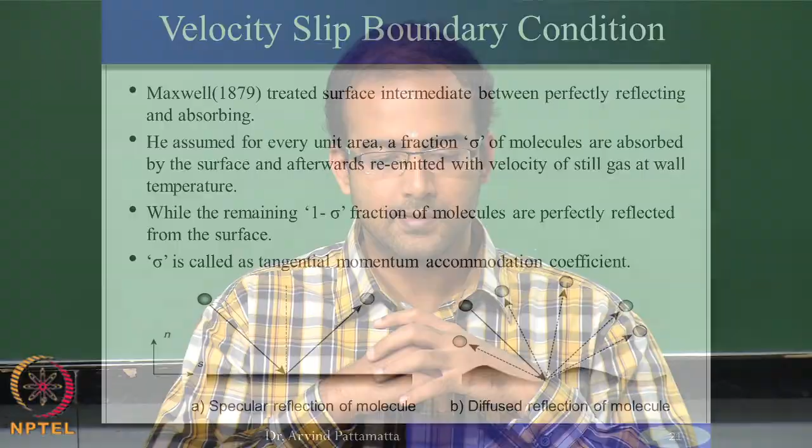Therefore, Maxwell proposed that of the total number of molecules, a fraction sigma will be emitted the way diffuse scattering takes place, and the rest, 1 minus sigma, will be emitted the way specular scattering takes place. Okay. So, this sigma he called the momentum accommodation coefficient. Okay. That means it tells you whether you conserve momentum or not. The expression for this you can say

you can either write components in the tangential or in the normal direction, but the general philosophy is you define the momentum accommodation coefficient as the ratio of the difference between the incoming momentum and the momentum of the reflected energy carrier or gas molecule which is leaving the boundary, divided by the difference between the incoming momentum and the momentum according to the Maxwell-Boltzmann distribution function. Okay. So, that is your Pw, that is your thermalized value based on the Maxwell-Boltzmann distribution. So, what does it mean in the case of diffuse scattering? What should be the value of the momentum accommodation coefficient?

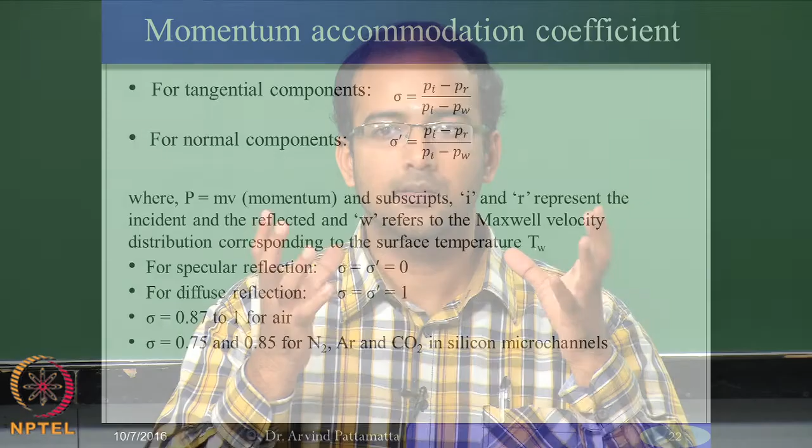What do you think will be the value of PR? PR will be equal to Pw in the case of diffuse scattering, because everything is absorbed, thermalized and emitted based on the conditions on the boundary. Okay. So, it is emitted like your condition, we put F plus is equal to F equilibrium, that is your diffuse boundary condition. So, therefore, in the case of diffuse scattering, your sigma will be equal to what?

1. Okay. So, whereas if you talk about specular scattering, what happens to sigma? 0, because PR will be equal to Pi. Okay. The momentum is perfectly conserved and it does not have any idea about what is the momentum depending on the Maxwell-Boltzmann statistics. Okay. So, in that case your sigma will be equal to 0, it is a perfectly reflecting surface, and the other diffuse scattering will be sigma equal to 1, right.

So, therefore, depending on the kind of scattering, either diffuse or specular, and this already you know from the knowledge of nanoscale transport. You know that these two are the possible kinds of boundary conditions you apply and solve from the Boltzmann transport equation. However, what happens, how do you incorporate this information into the continuum equation? Now, this is where it is becoming very tricky.

If you solve the equation, it is through the approximation made by Kundt and Warburg. So, they have said that this is equivalent to giving a slip boundary condition at the wall, provided you know your slip boundary condition is related to the slip length. Okay. The slip length value is xi times the velocity gradient at the wall. So, therefore, somehow the slip length should be related to this accommodation coefficient.

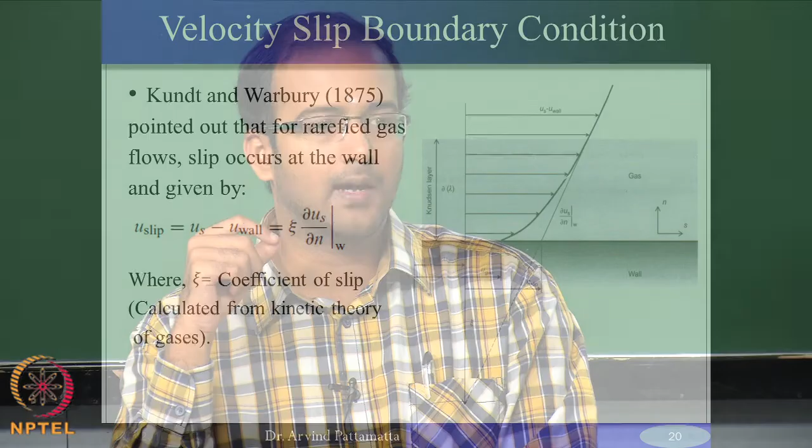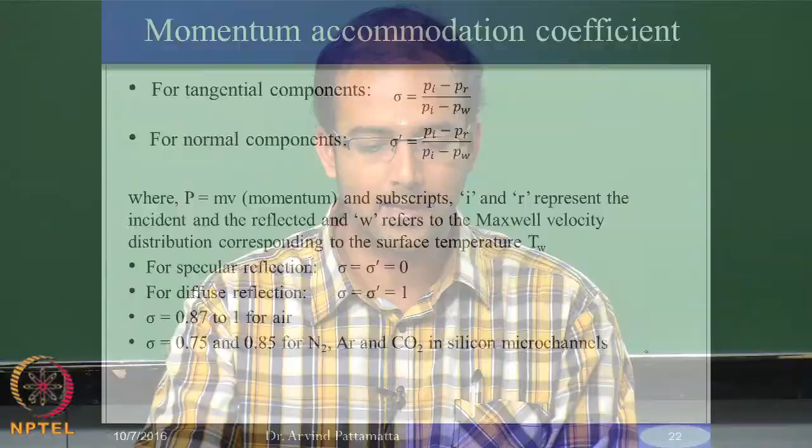So, the accommodation coefficient has the knowledge of the microscale scattering at the boundaries, and somehow in an ad hoc empirical manner that has to be accounted for through the formulation of slip length, and therefore, you assume that the slip length can be related to the accommodation coefficient through an expression like this. That means, for example, in this case you can write this as (2 minus sigma) by sigma times the mean free path of the gas molecules. So, this is one ad hoc way of expressing the relation between slip length and the accommodation coefficient.

So, in the case of diffuse scattering, your sigma equal to 1, and therefore, your slip length will be equal to what? Lambda, mean free path. Okay. So, in the case of specular scattering, what will be the value? If you are approaching value of sigma going to 0, this value will go to infinity, right. So, the slip length is approaching infinity. Okay. So, these are two extreme limits,

and between these two limits you can assume some values, something like sigma equal to 0.2 or 0.3 or 0.5, or if you know exactly the value for a particular fluid. For example, if you take the case of air, generally values of sigma are quite high, it is towards the diffuse side. So, it is between 0.87 and 1. Okay. So, if you take some other inert gases like argon, nitrogen, and also depends on the surface material. If you look at silicon material as a microchannel, and if you use nitrogen or argon or carbon dioxide, so the values of this sigma can vary between 0.75 and 0.85. Okay. So, they are always closer to the diffuse scattering.

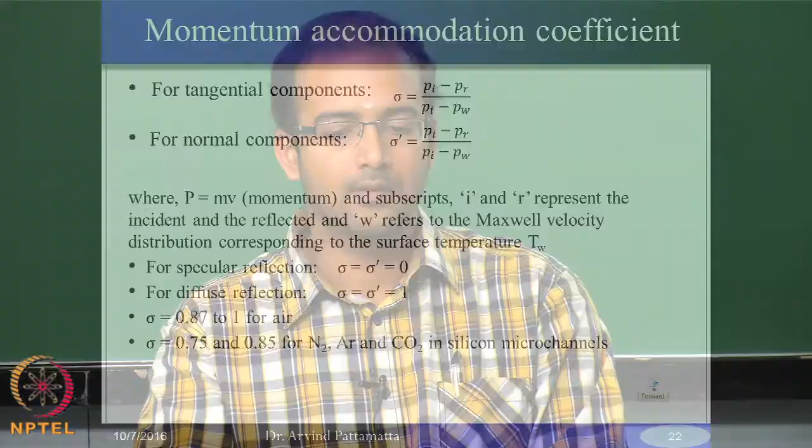Okay. Maxwell velocity distribution is some function of some exponential type, or is there any distribution is available? No, but that is correct, but the value of sigma theoretically cannot be calculated. Although we define sigma in this way, you cannot use theory to calculate sigma. It is only coming from experimental conditions, where, as I said yesterday, how do you determine experimentally? You just extrapolate it, make a virtual origin and determine what is your slip length, and then now you have related your slip length with sigma, and therefore, you can back calculate from experiment what will be the value of sigma. Okay. So, that is the standard procedure.

So, therefore, this is one component of the velocity slip, and in many experiments they have observed that, theoretically, if you add this, the theoretical value of the velocity slip is not matching the experimental value. So, there is also some extra component which is causing an additional slip at the wall, which could not be explained by this particular term alone. So, later on they understood that this was due to a phenomenon called thermal creep.

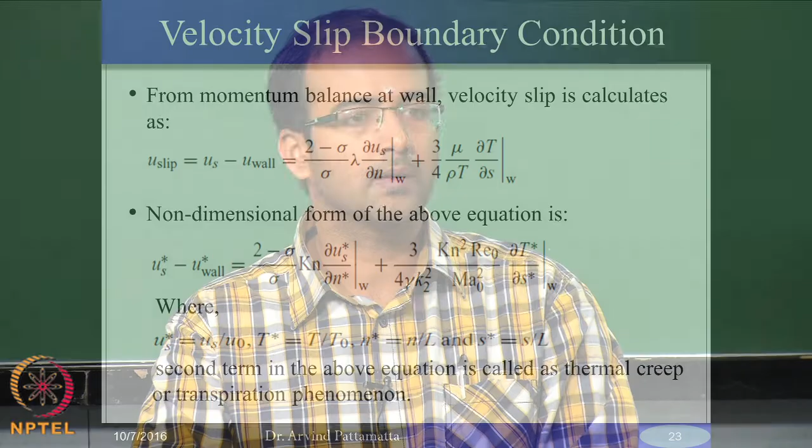Okay. So, in which you also produce additional slip due to a temperature gradient. So, in addition to having a uniform temperature, in a case where you have a temperature gradient, the gas molecules tend to move from the lower temperature side to a higher temperature side, that is in the direction of the applied temperature gradient. So, in addition to the normal Maxwell slip, you also have an additional slip due to the thermal creep. So, the second term here represents the thermal creep slip.

So, that is related to your temperature gradient, which is tangential, which is along the wall, applied in the tangential direction, whereas the velocity gradient is in the normal direction to the wall. So, therefore, these two components put together would adequately explain the slip velocities that are measured experimentally. Okay. So, in general, this kind of slip boundary condition has become popularly referred to as the Maxwell slip boundary.

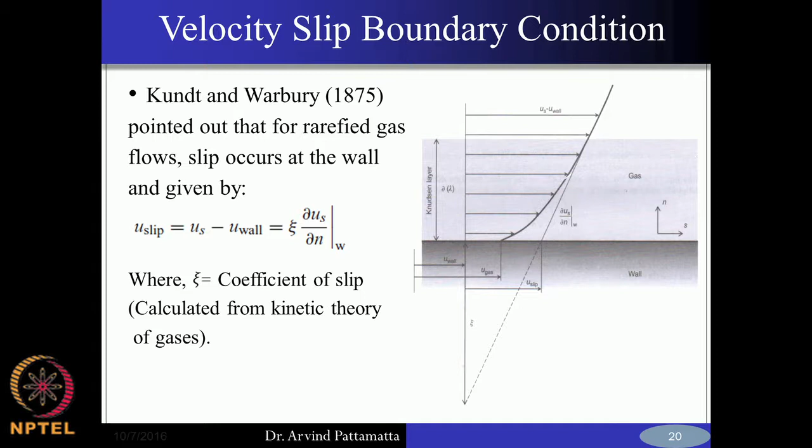Some people also refer to this formulation that we are referring to here as the Navier slip boundary. Okay. So, in the Navier slip boundary, you just give some value of slip length arbitrarily, it could be 0.5 or 0.7 or 0.2, whatever it is, but if you want to relate it in terms of accommodation coefficients, then it becomes the Maxwell slip boundary condition. Okay. And apart from that, you can also write boundary conditions for temperature, right.

We have seen that you can have slip of both momentum as well as energy or temperature. So, this we have already seen in nanoscale transport. There is a temperature discontinuity at the boundary, and at high Knudsen numbers, you will find this discontinuity will increase. Therefore, to account for this, a similar analogy has been drawn, only that in place of the momentum accommodation coefficient sigma, we replace this with what we call the thermal accommodation coefficient sigma subscript T.

Okay. So, same analogy, except that we assume that these gas molecules with some energy are approaching the boundary, and a fraction of that is absorbed and re-emitted based on the Maxwell-Boltzmann statistics, the other is reflected perfectly. But in this case, to distinguish this fraction from the momentum accommodation coefficient, we use the notation sigma subscript T. Okay. And we once again rewrite it the same way as the velocity slip, we introduce a parameter called the temperature slip, which is the temperature of the fluid at the boundary minus the wall temperature. Okay. So, that is equal to a different slip length now.

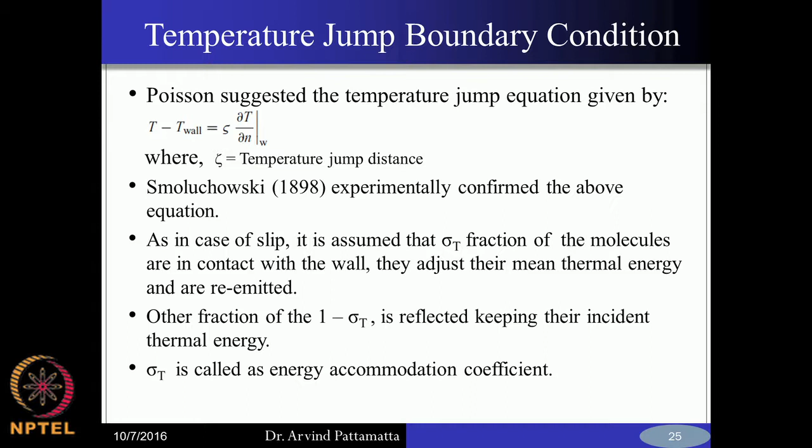So, this is actually popularly referred to as the Smoluchowski boundary condition, because Smoluchowski experimentally confirmed that this kind of equation can be used to match the theoretical value of temperature slip with the experiment very well, using this parameter and assuming values of sigma T. Okay. So, therefore, this boundary condition is referred to as the Smoluchowski slip boundary. So, the velocity one is referred to as Maxwell slip, and the temperature slip is referred to as Smoluchowski, right.

So, therefore, we can non-dimensionalize whether it is the velocity slip or temperature slip. As you can see, you have a mean free path here. So, if you non-dimensionalize your coordinate with respect to the characteristic dimension, the characteristic length scale L, for example, you introduce a new normal coordinate n star, which is equal to n by L, this is your normal coordinate, and similarly the tangential coordinate as S by L.

So, you can write this in terms of Knudsen number, and again the slip due to thermal creep also can be written in terms of Knudsen number squared, Reynolds number by Mach number squared. Therefore, sometimes these boundary conditions are also expressed in terms of purely non-dimensional numbers. So, these are non-dimensional values of slip. Similarly, you can do the same thing for the temperature slip. You can write this purely in non-dimensional fashion. You get a ratio of Knudsen number by Prandtl number.

Okay. So, once you now understand how this micro scale non-equilibrium at the wall can be incorporated into the continuum equation using these slip approximations for velocity and temperature, now it becomes quite easy to solve these governing equations for some standard cases like flow between two parallel plates, flow in a duct. So, these are some simple cases for which analytical solutions can be obtained. Only that now in the case of slip regime, you replace your no slip boundary condition with the appropriate Maxwell and Smoluchowski slip conditions.

Just to give some additional data, for sigma t, for combination of air, aluminum, air, steel, you have different values which are close to 1, whereas if you take clean surfaces without any deposition, which are quite smooth without much roughness, and use helium gas for example, this can be very small, close to 0. So, this 0.02 is the value of the thermal accommodation coefficient. Similar to how we define the momentum accommodation coefficient, we can define this based on the difference between the incoming energy of the gas molecules and what is coming out, divided by incoming minus what is emitted based on the Maxwell-Boltzmann distribution. So, I hope this is clear.

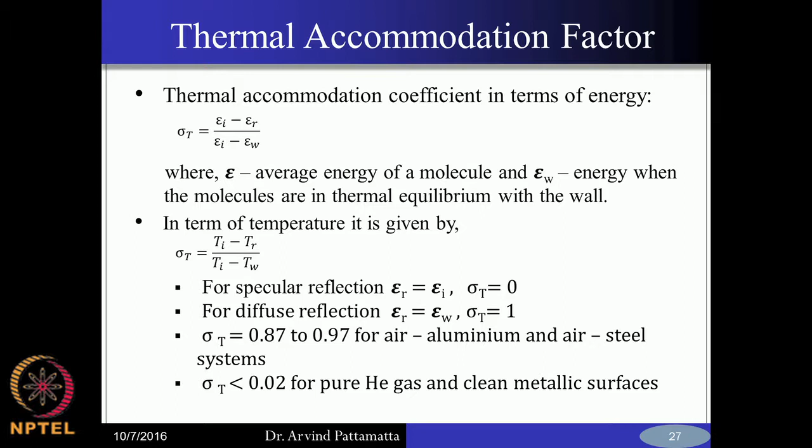So, this is the foundation of the slip flow regime. Now that we have defined the boundary conditions, we also know the conservation equations, which are for the compressible, Newtonian and isotropic case, and also the Knudsen number should be less than 0.1. This is where the continuum equations can be applied. So, this is called the slip flow regime. In this case, you solve the compressible form of the Navier-Stokes equation along with the appropriate slip boundary conditions, and this can quite accurately predict most of the experimental results in this particular slip flow regime.

And we will take the case where we can develop an analytical solution, that is, let us take a microchannel. Microchannel here means it is simply the 2-dimensional case of flow between two parallel plates. Just like you do your fluid mechanics of flow between two parallel plates, the same analysis is done here. So, we take the separation between the plates as distance 2h. Therefore, the origin starts from the center. It extends to plus h on to the top plate and minus h to the bottom plate, and you also assume the following things.

One, you are looking at only a steady state, steady flow system. Therefore, all the derivatives with respect to time can be assumed to be 0. So, all of the d rho by dt, du by dt, dT by dt, all of this are gone, and the other important condition to simplify this is fully developed. So, you assume the profiles to be fully developed, meaning you do not have any gradients of velocity in the x direction. In this case you have z coordinate. So, in the z direction, and also this is a 2D system, you do not have any gradient in the third direction.

Based on this you will be able to reduce the equations, and also you can assume that there are no volumetric forces, and to first start the hydrodynamic problem, there is no heat transfer. So, it is all isothermal. With this you can reduce the compressible Navier-Stokes equation to the following form. You only have the viscous forces, the shear stresses, and the other is your pressure gradient. So, the viscous force is balanced by the pressure gradient. The viscous force in this case will be the diffusion only in the y direction, that is your d square u by dy square.

And the pressure gradient will be in the z direction. So, your dp by dz, that means if you draw a control volume, you will have a viscous force on the top and the bottom plates, and this is to be balanced by the pressure gradient, and this viscous force is nothing but due to the diffusion of velocity in the vertical direction. Okay. So, therefore, the entire compressible equations reduce to a very simple form which is similar to your incompressible equation

for channel flow. Okay. So, therefore, there will not be any big difference between compressible and incompressible now that you have assumed a steady state and fully developed flows. And then we go on, we apply the boundary conditions to solve this. Now, the condition at y equal to 0 will be symmetry, right.

So, we have taken the origin to be at the center of the channel, and therefore, at y equal to 0 you can say that the velocity profiles will be symmetric between the top half and the bottom half, and you can simply apply the symmetry condition, which is du by dy equal to 0. Okay. And on the other side, so y equal to plus h, in the conventional channel case you will give the no slip condition, which is u equal to 0, but now you give the Maxwell slip boundary condition. Okay. So, therefore,

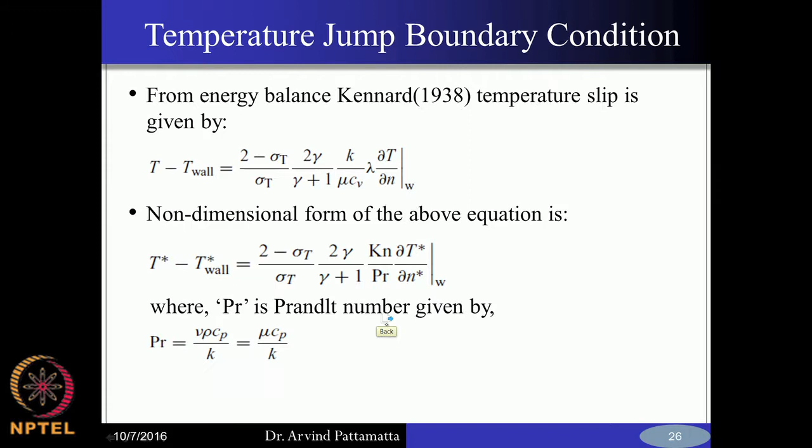So, in order to get the constants a1 and a2, you apply the two boundary conditions at y equal to 0 and y equal to h. So, can you try to do this now? So, you apply these two conditions, find out the constants and calculate how the velocity profile looks.

I think in this case the derivative is negative, no. So, your velocity profile is maximum at the center, and at y equal to h it will be negative. So, in order to get a positive value, you put, I think, a negative sign here. Your du by dy will be negative, right. So, in order to make sure your velocity is positive, therefore, you put a minus sign there, right. Otherwise, you get a negative value of velocity, which is not physical.

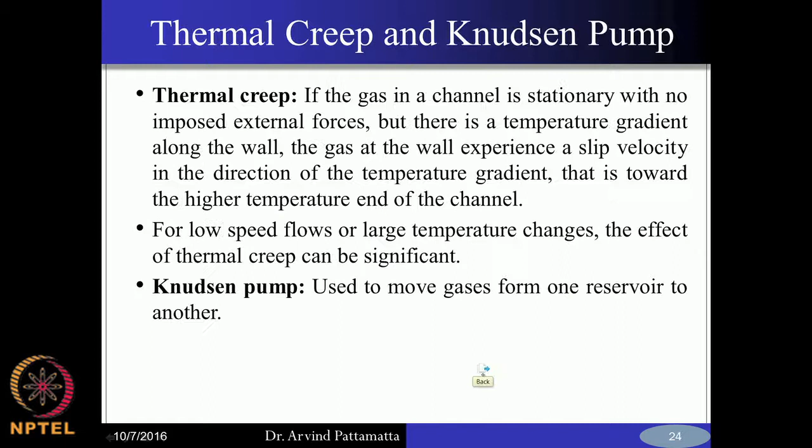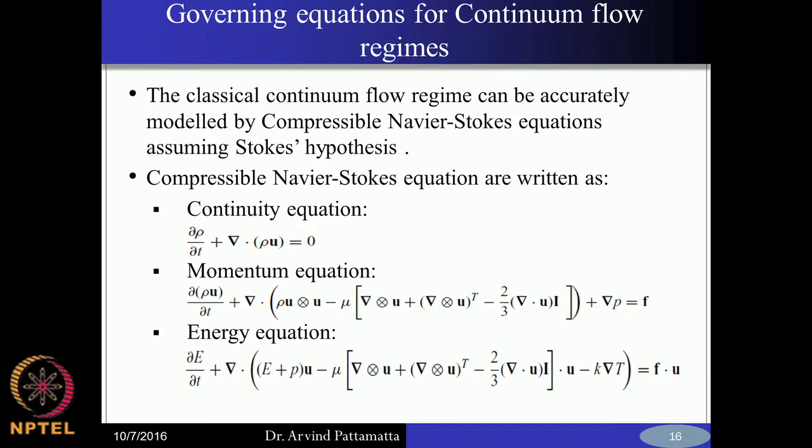So, in the case of no slip, you will get a2 equal to 0, but here you have a value at y equal to 0, right. Yeah, a1 is 0, right. So, you should be getting something of this form.

So, therefore, now the difference between the slip and the no slip velocity profile is, if you simply substitute Knudsen number of 0, you get your profile for the no slip boundary condition case, 1 minus y star square. So, y star is nothing but y by h. So, therefore, you get your conventional parabolic profile with the maximum at the center line. Now, apart from that, you have the additional factor which is dependent on the accommodation coefficient coming from the boundary condition.

Okay. So, therefore, depending on the value of Knudsen number, the higher the value of Knudsen number, the larger will be your value of the mean velocity, right. So, what you are seeing is that for a fixed value of pressure drop, as your Knudsen number keeps increasing, the average velocity also keeps increasing because of the higher slip. So, that means you are getting more mass flow rate for the same value of pressure drop.

So, somewhere a negative sign is missing, we are actually getting y star square minus 1 and sigma minus 2. Instead of 1 minus y star square, you are getting y star square minus 1, is it? And also if you had applied this minus sign, is it? Yeah, we applied that minus sign. If you do not apply the minus sign, we will get this one.

Okay, probably there is an error, because this is your correct profile, because at Knudsen number equal to 0, it gives back your macro channel velocity profile. Okay, so probably then this minus sign is not needed here. Okay, you please check that. If you get opposite sign, then you remove the negative sign there. If we do not use that negative sign, then it will come out as 1 plus y star square.

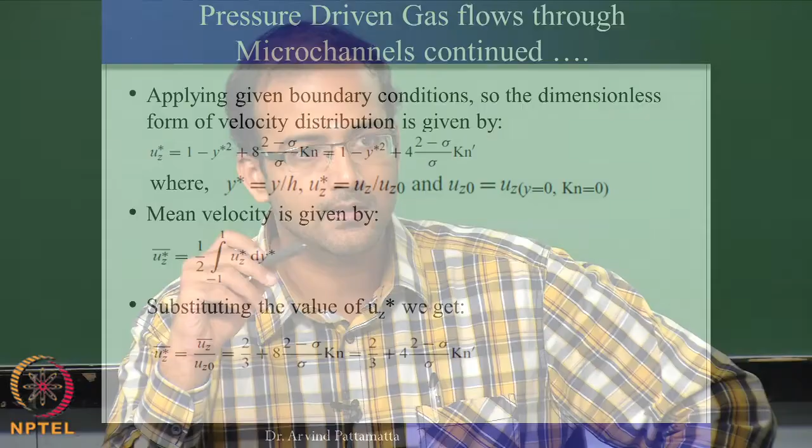So then you are getting correctly, is it? 1 plus y star square. Yeah. But if you use the negative, are you getting 1 minus y star square, y star square minus 1? Minus 1. Yeah.

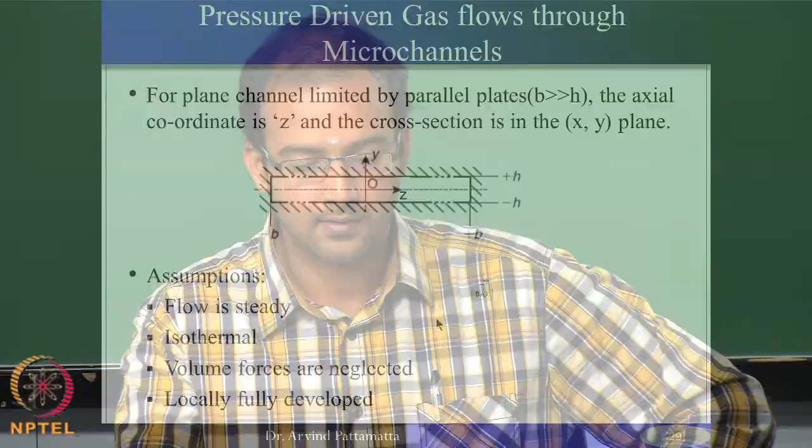The momentum equation itself should have a minus sign there, because the viscous force and pressure gradient are in the same direction. Right now, see, these are both on the right hand side, right? So this is minus dp by dz, yeah, I think then this is okay. So if you have a negative sign in the momentum equation, will that be fine? It will make it 1 minus y star square.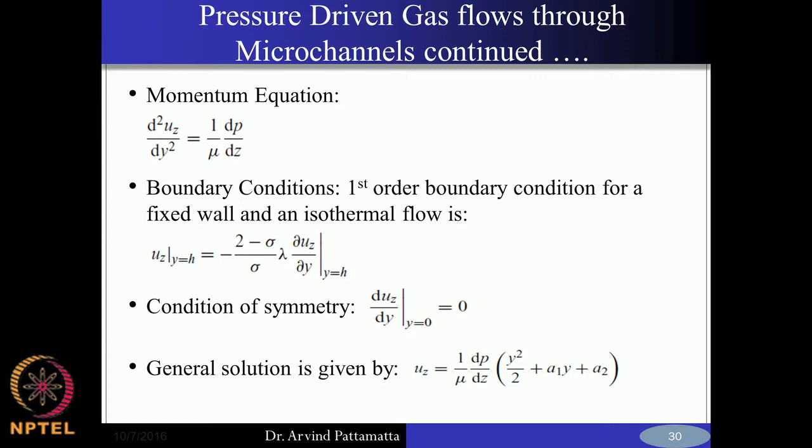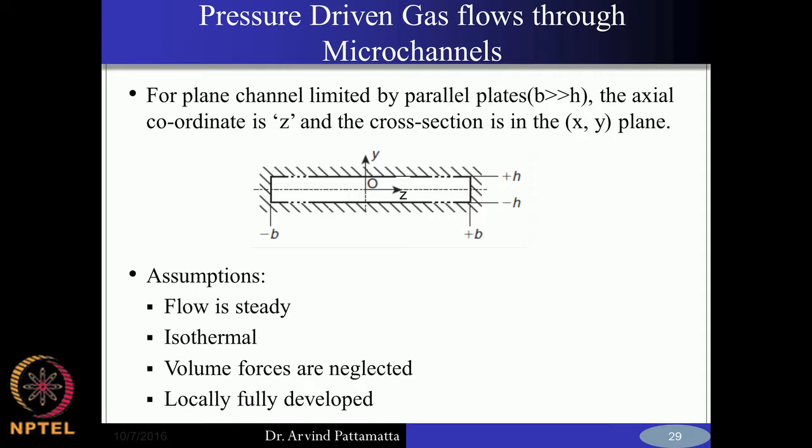Or the other way of evaluating it, apply this at y equal to minus h, okay, y equal to 0 and y equal to minus h with a positive sign, and see if you are getting the same profile. If you get that, then you use the bottom half rather than the top half. Okay, so in the bottom half, your slip at the wall should be 2 minus sigma by sigma lambda into du z by dy. But this should also work out, I do not know, but the final equation is correct. Okay, you just please check where you are going wrong with the sign. We'll try again. Yeah. So this is your final equation in terms of Knudsen number.

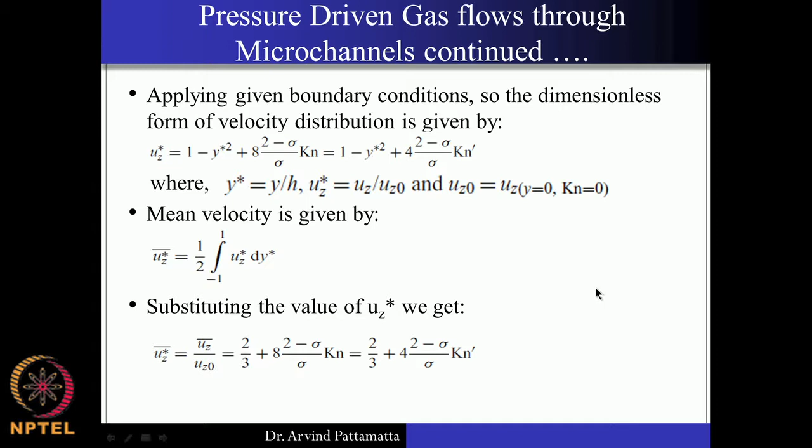Now, depending on the value of Knudsen number, you get additional average velocity or additional flow rate because of the slip. Okay, so therefore you can go ahead and find out the other integral quantities like the skin friction coefficient. You can calculate your wall shear stress based on the gradient of velocity at the wall, and therefore you can calculate your skin friction coefficient and so on, and you can also calculate the pressure drop or the Poiseuille number. So that Poiseuille number is nothing but basically friction factor times your Reynolds number.

Okay. So the friction factor that you have defined here is called the Fanning friction factor. This is in terms of wall shear stress by half rho u square. So this is similar to your skin friction coefficient for external flows. The other friction factor which you can define is in terms of pressure drop, that is called the Darcy friction factor. So if you write down the relationship for Darcy friction factor in terms of Reynolds number for a circular duct.

So for the case of macro ducts, you get f equal to 64 by Re, or in terms of the Cf that you have written here, it will be 16 by Re. Okay. So the product of the friction factor times Reynolds number is called the Poiseuille number. In the case of macrochannel circular ducts, your Poiseuille number is equal to 64.

Now in the case of microchannel ducts with slip boundary condition, this will become a function of the Knudsen number. Okay. So therefore the product of friction factor times Reynolds number will not be a constant anymore, it will be a function of Knudsen number. For the case of Knudsen number going to 0, this will go to the value of 24, which is the case for channel flow. Okay. For duct flow you have 64, and for channel flow you have 24, right. So you can write therefore the Poiseuille number as a function of Knudsen number through this particular expression.

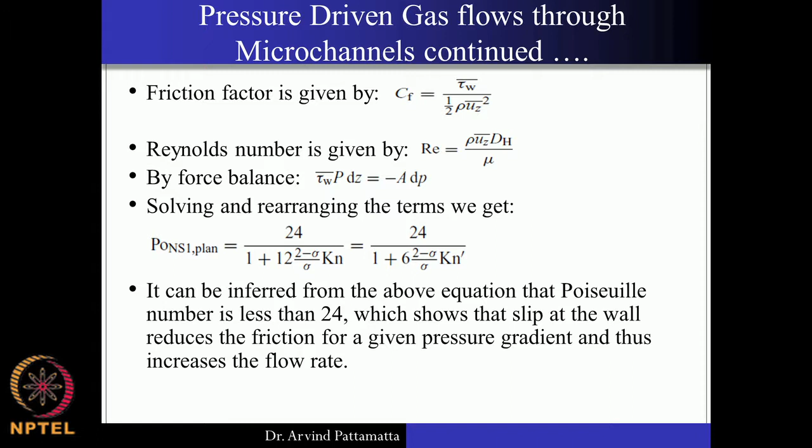So what it tells you is that if you are increasing your Knudsen number, the Poiseuille number will reduce. Okay, that means for a given flow rate your pressure drop is actually lower, or for a given pressure drop you get higher flow rate. So, this is the effect of slip at the walls. Okay. So, this is good as far as the pressure drop is concerned.

So, if you are pumping a certain flow rate, right, the pressure drop required to drive this in the micro channel will be lower than in the macro channel case, right. Or if you apply the same pumping pressure gradient to pump the flow, you get a higher flow rate, right. So, this is a beneficial effect of the gas flows in the slip regime of the micro channel.

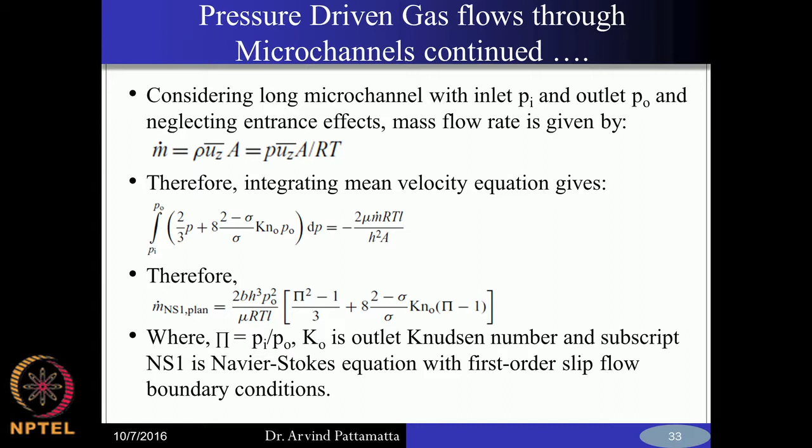So, therefore, we can also calculate what is called a non-dimensional mass flow rate, which gives you the actual mass flow rate calculated from the slip boundary condition divided by the mass flow rate calculated from the no slip boundary condition. Okay. So, obviously, the numerator is larger than the denominator. Okay. So, this comes out to be again a function of the accommodation coefficient, the Knudsen number, and the pressure ratio. Okay. So, the denominator here has nothing but the pressure ratio, that is the ratio of the inlet and outlet pressures, and the Knudsen number.

Okay. So, if your Knudsen number is equal to 0, this non-dimensional mass flow rate will be equal to 1, and for larger Knudsen number this will be greater than 1. So, that means as your Knudsen number keeps increasing, this non-dimensional mass flow rate will also subsequently increase. So, therefore, when you plot the non-dimensional mass flow rate as a function of Knudsen number, okay, the reciprocal of this should keep decreasing with respect to increasing Knudsen number. So, as your Knudsen number keeps going up, higher will be the flow rate, or the inverse of this should be lower, right.

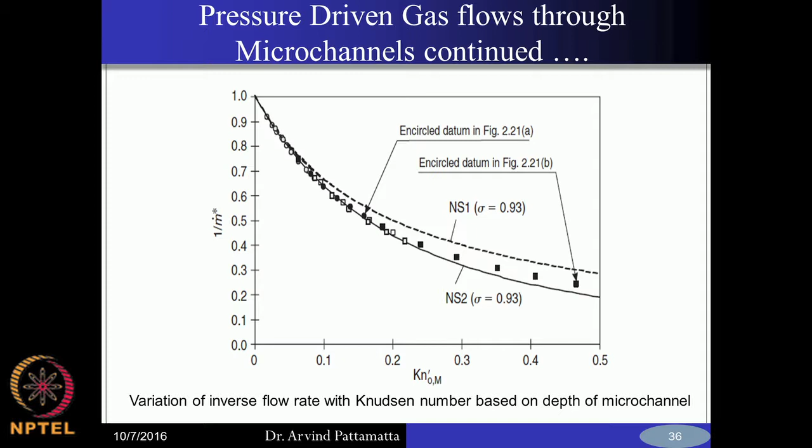Okay. So, with that you see that if you use just a first order slip beyond Knudsen number of 0.1, these symbols are actually the experimental values, and whatever is computed is basically these lines. So, if you use the first order slip boundary condition, you get a good agreement till Knudsen number of 0.1. For higher Knudsen numbers you do not get a good agreement, whereas if you use a second order slip, even for Knudsen numbers of up to say 0.2, 0.3, you are able to get a good agreement. So, beyond that even the second order slip will not be able to match with the experiment well. Okay.

Coming to the heat transfer problem, we solved the fluid mechanics problem for the velocity profile. Now, we can also solve the energy equation for fully developed, both hydrodynamically and thermally. The energy equation will be similar to the macro scale parallel plate energy equation. The only difference is that we will be applying the slip boundary condition at the wall. So, at y equal to 0 you still have the symmetry boundary condition, and at y equal to h you have the slip boundary condition.

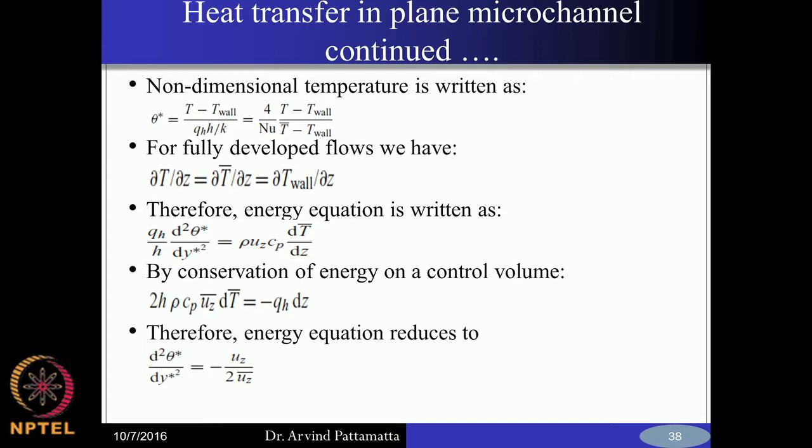Just to summarize, I am skipping all the details; these are available in any textbook related to microchannel flows. The book that I am following is by Satish Kandlikar and Srinivas Garimella, on flows and heat transfer in micro and mini channels.

I think this is a pretty straightforward analysis, similar to the macro channel. The only difference comes in terms of the boundary conditions, where you apply the slip boundary condition at the wall, and similar to your velocity profile, you get your temperature profile. Now, this zeta star here is a function of your accommodation coefficient, Knudsen number and Prandtl number. This is coming from the slip boundary condition. All these are written in non-dimensional form, and this is your expression for the temperature profile. If you calculate the Nusselt number at the wall from this, it also turns out to be a function of the accommodation coefficients and the Knudsen number.

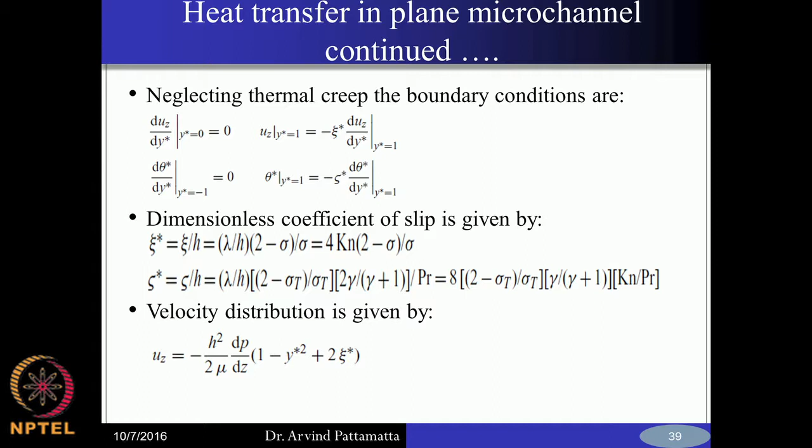If your Knudsen number is equal to 0, the value of zeta star will also be 0 at the wall. So, in the limiting case where the Knudsen number equals 0, this Nusselt number will reach the value of 140 by 17, which is the value of the Nusselt number for heat transfer in macro channels. For a larger Knudsen number, you use this particular expression to calculate the actual heat transfer coefficient.

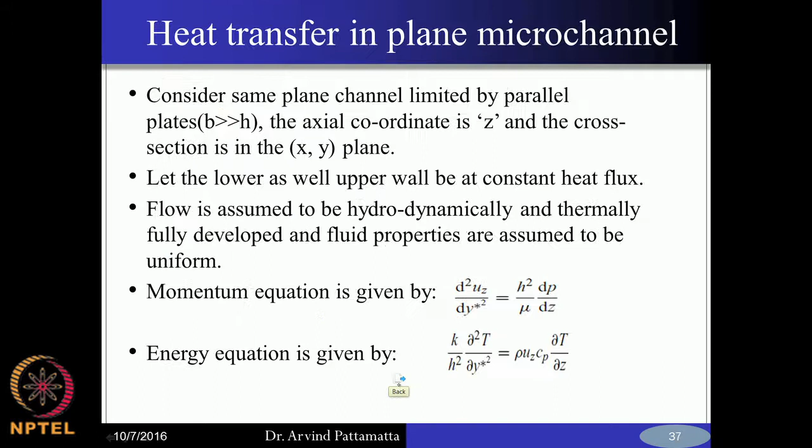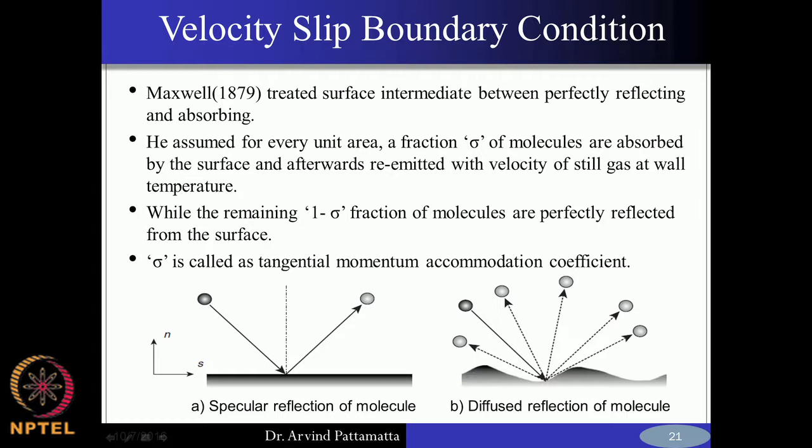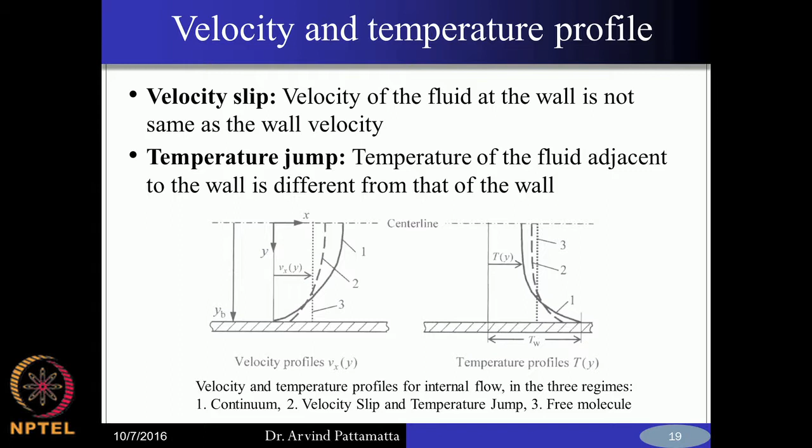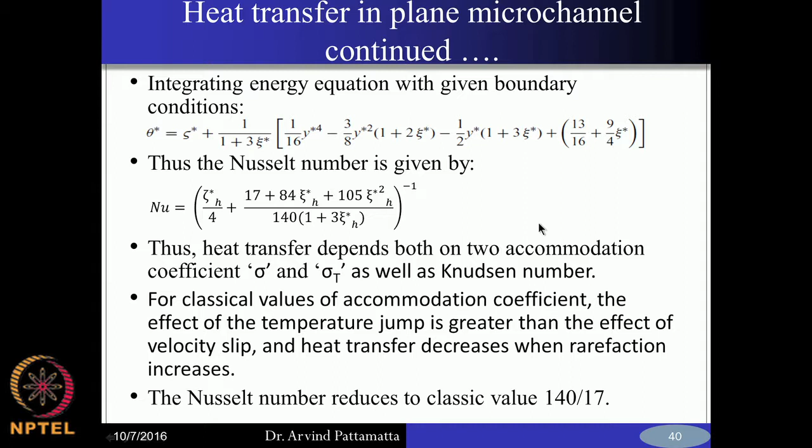also decreases. So, although the pressure drop decreases, consequently the convective heat transfer coefficient, or Nusselt number, also drops. From the hydrodynamic point of view, it is very convenient to operate with slip flows, but from the heat transfer point of view, it is not so beneficial. So, if you are looking at larger Knudsen numbers, the Nusselt number will be reducing as given by this particular expression, whereas for the macro scale case, it comes back to the classical value of 140 by 17.

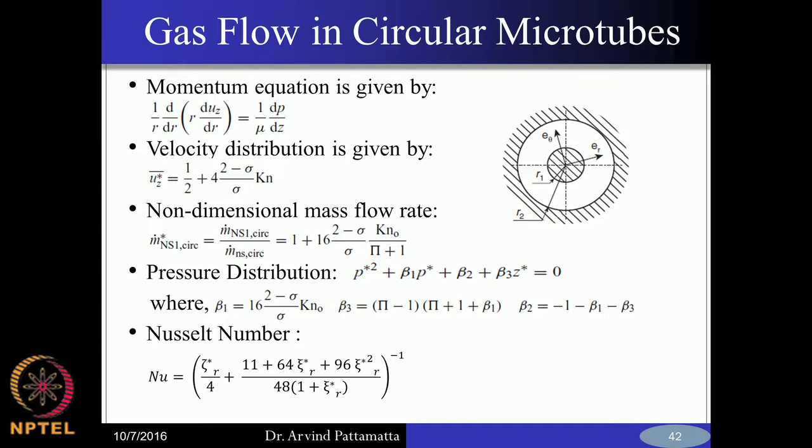Okay. So, that is 4.36. That is the case of constant heat flux, laminar, fully developed hydrodynamically and thermally in a circular duct. That is your macro scale case. Now, in the micro duct, micro tube case, these values are smaller than 48 by 11.

Okay. So, this expression can be used similar to the channel case. For the channel case you have a different expression, and for circular microtubes you have this expression. So, this is the summary if you want to calculate heat transfer for gas flows in microchannels. For a 2D microchannel you use the expression on the top, and for the 3D microchannel, for a circular tube, you use the expression on the bottom.

Okay. And if you plot these, you can basically see that the parallel plate case has a higher value of Nusselt number compared to the circular tube, and again for different values of the momentum and the thermal accommodation coefficients, you can produce different values of Nusselt numbers. So, these are functions of accommodation coefficients as well as the Knudsen number. Okay. So, as your Knudsen number keeps increasing, your Nusselt number reduces.

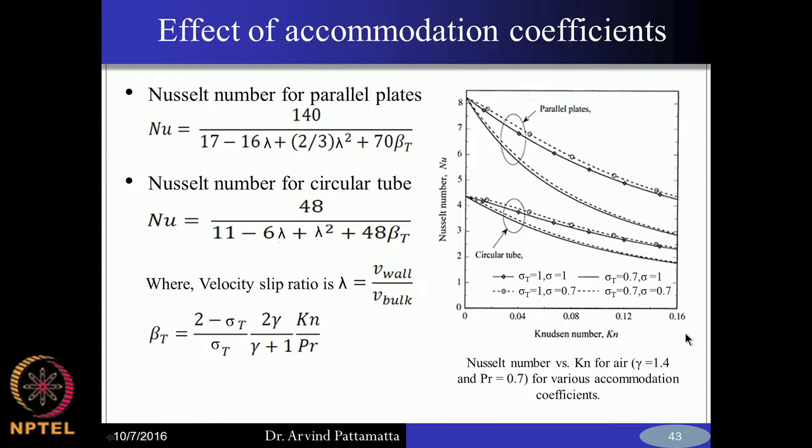Okay, just a last topic I want to complete this portion. So, as we said, all this analysis is good if you are looking at Knudsen numbers of up to 0.1. If you are going to higher Knudsen numbers, with the use of second order slip, to some extent you can still solve the continuum equation, but we are going further and further away from the assumption of continuum, and therefore we have to resort to finally going back to the Boltzmann transport equation for larger Knudsen numbers, and for Knudsen numbers greater than 1, definitely continuum equations cannot be used.

But solving the Boltzmann equation is also computationally very expensive, especially if you have 3 dimensional flows. So, one alternative is that people use what is called the Chapman-Enskog expansion of the Boltzmann equation. Okay. So, this is a very classic way of deriving all the continuum equations starting from the Boltzmann equation. For example, for the viscous stress tensor and the heat flux vector, you get several terms starting from the lowest order approximation up to, if you include all the terms together, the equivalent of solving your Boltzmann equation.

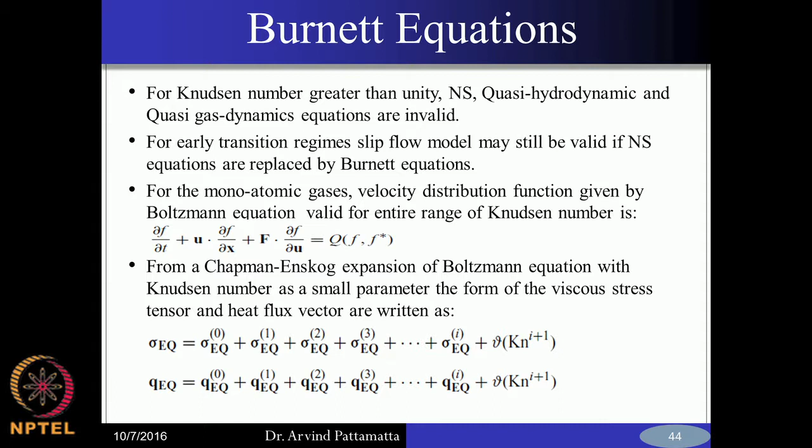Okay. So, if you remove all the higher order terms and use only the lowest order term, that is your lowest order approximation. So, if you expand your viscous stress tensor and your heat flux vector based on the Chapman-Enskog expansion, you end up getting a series solution starting from the lowest order to the highest order terms, and if you are taking only the lowest order term, that will give you the Euler equation. For example, if you retain only the 0th order term, the viscous flux is equal to 0 and heat flux is equal to 0, that means there is no diffusion. So, this is nothing but the Euler equation.

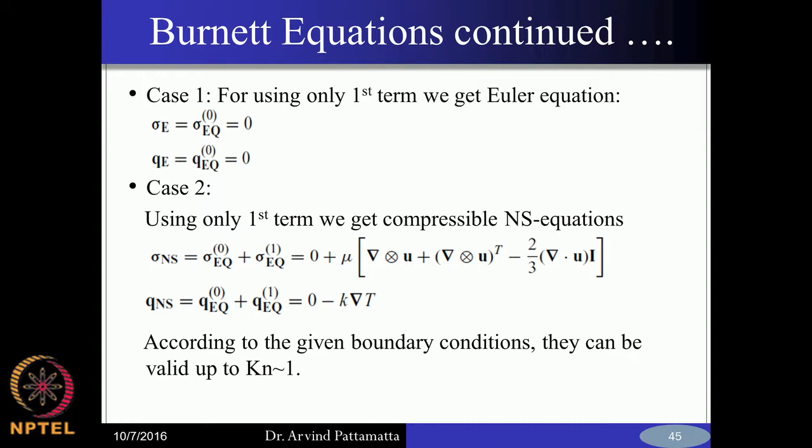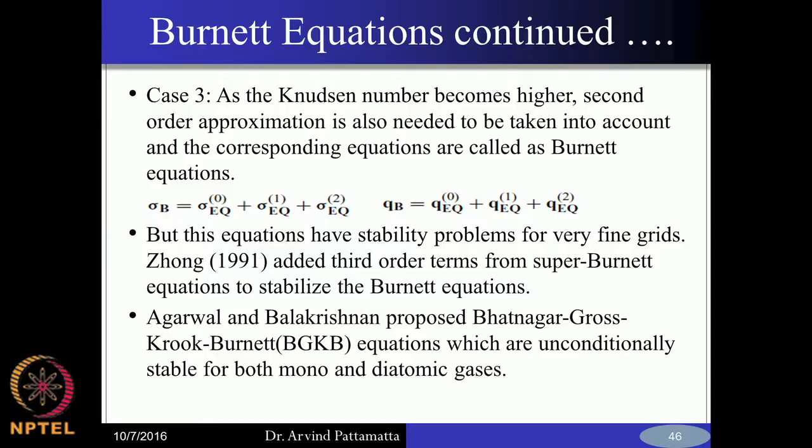Whereas, if you incorporate both the 0th order and the first order terms together, you get your Navier-Stokes equation. Any other higher order terms that you incorporate will give you better solutions for higher Knudsen numbers. Okay. So, what people did was incorporate the second order terms for larger Knudsen numbers. With that, including the 0th order, first order and second order terms together, you get what is called the Burnett equation. I am not writing down the equation, these are very large equations because of so many terms, but nevertheless when you look at Knudsen numbers greater than 0.3, 0.4, people inevitably have to solve these Burnett equations, and these can give a better solution compared to the continuum equations.

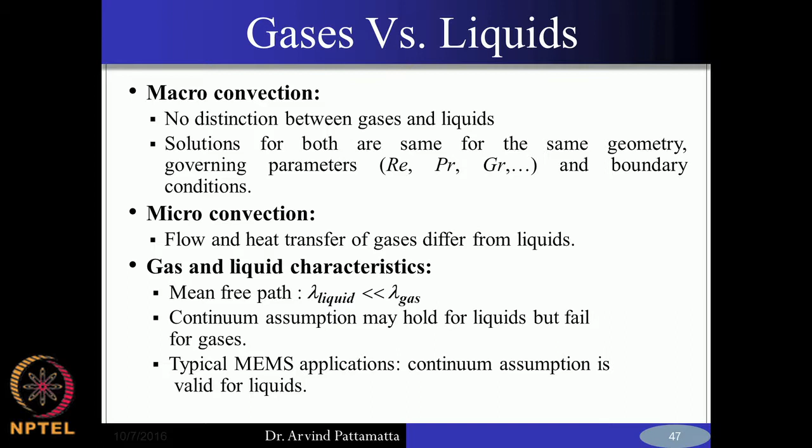Okay. So, with that we will stop this portion on gas flows in microchannels. The most important aspects I have covered. The next topic that we will be looking at is liquid flows in microchannels.

Okay. So, before we go on, I will stop here, but you should understand that liquids, in the sense of Knudsen number, have much smaller Knudsen numbers for the same diameter ducts compared to gases. So, hardly do you go into the slip regime itself. Most of the time you are talking about Knudsen number values less than 0.01, even for duct diameters of the order of a few microns. So, usually in liquid flows you do not have any problem using the continuum equations with the no slip boundary conditions. Okay.